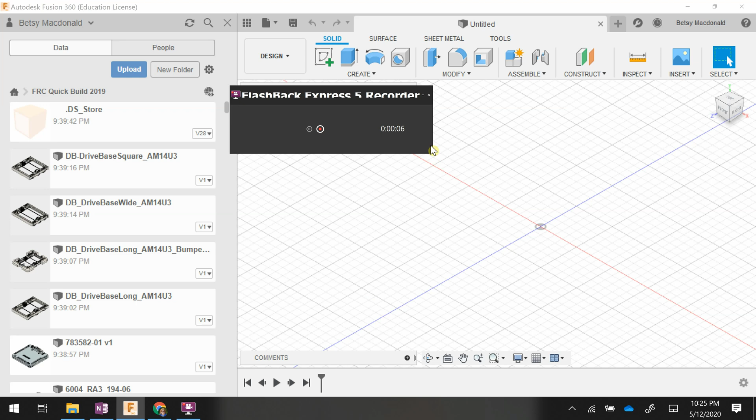So we need to have our QuickBuild open. I left mine in downloads. I'm going to go back to downloads and go to the robot QuickBuild folder that I unzipped, and open the user guide with bumpers. Sorry I didn't have that open ahead of time, I just wanted to remind you it came in a zipped folder.

Okay, so the beginning of the document has a parts list, a tools list, and a few other things. You can see the page we need to start on is page 9. If you're not on page 9, you can just navigate there, depending on which PDF reader you are using. Anyway, page 9 shows that we're going to need 4 outer wheels.

Now we're only going to build one wheel. We're going to build it as a component and we'll end up using it 4 times.

So back over in Fusion, well, the first thing we got to do is make a... well, I haven't saved this. I'm going to save it. I think I deleted it after I practiced. Okay, so I'm going to call it chassis quick build. If you already have a saved document, don't worry about this.

Okay, so now we need to make a component. This is pretty important, so that's under assemble. We're going to make a new component. The parent is selected - that just means it shouldn't be buried within a different folder.

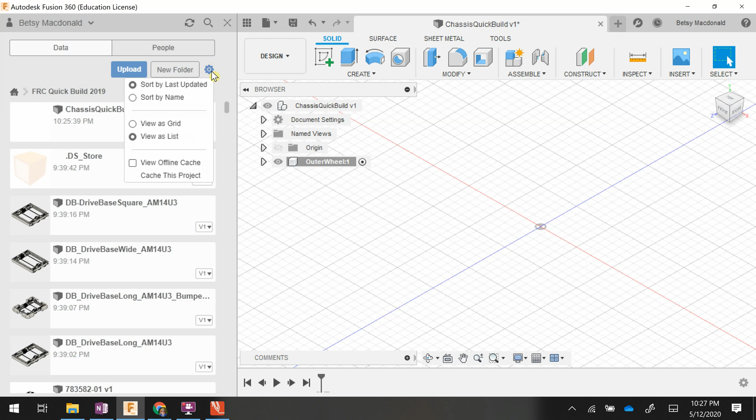So now we're going to find the pieces. Let's find this pulley - we're going to find 2 pulley halves, AM2234. You definitely want this sorting by name, and scroll down to the AM. Now we want 2234. Oops, I went too far.

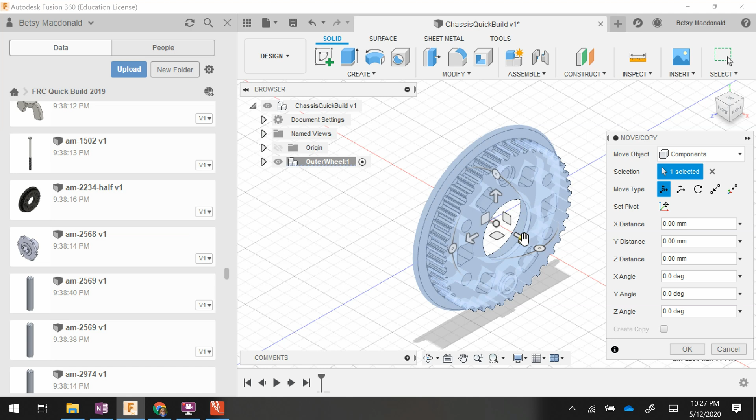Okay, so there's one. When you put a component in, it waits for you to position it. I don't know, we can move it back a little bit. Whatever, but there you go. We're going to click OK to place that one.

Now we're going to bring in another one. I'm going to pull it out a little bit so I have room, and shut this temporarily so we can maneuver to each one, and I'm going to click OK. Okay, so we have 2 wheel halves, and you can see that if I open the component we started, they got placed in there, which is perfect.

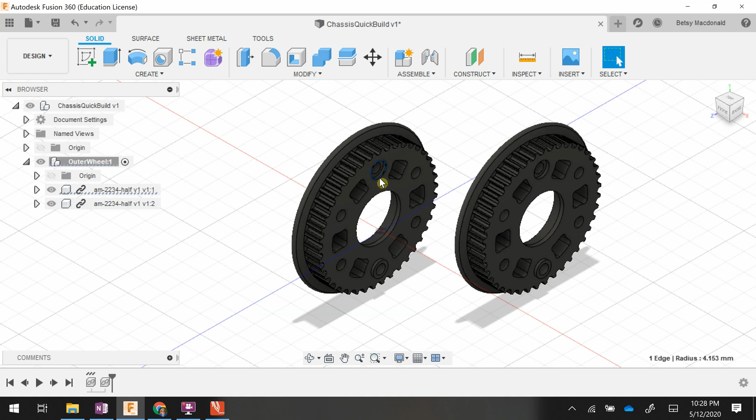Okay, so now we're going to use the joint skills we learned last time, and we basically want to joint this ring with this ring. So I'm going to click this ring, then hit the J key, and you can see it already knows it has this one selected. Now I'm going to click this select key. I'll zoom in a little more and make sure I clicked that ring.

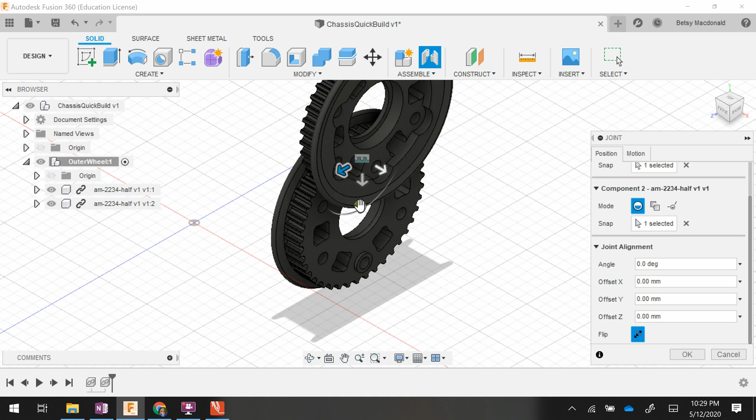Now, when they initially pair, they basically go identically on top. So if we come down here and click the flip button, and then re-rotate it 180 degrees so it's perfectly meshed. Okay, so you can see those were well meshed, and we'll leave those like that.

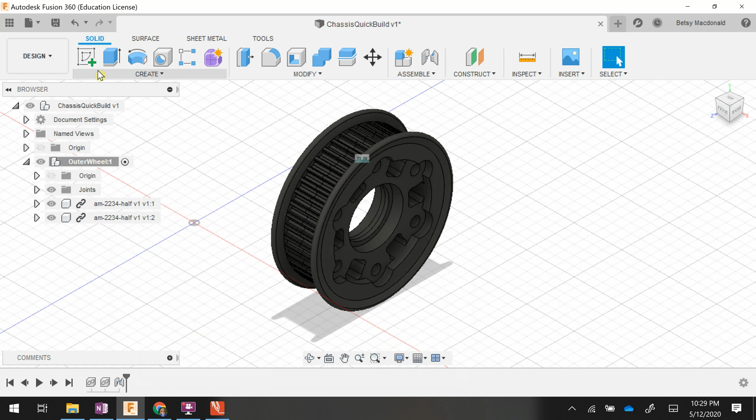So if I flip back to our quick build guide, we have these pieces meshed. Now we need this outer wheel, which is AM0940B. So if I go back, open up that again so I can see my parts - AM0940.

0940. Okay, this looks kind of strange. I'm going to put it in. I'm going to rotate it so it's facing the same direction. Now, there's something not right here because it doesn't have the inner structure.

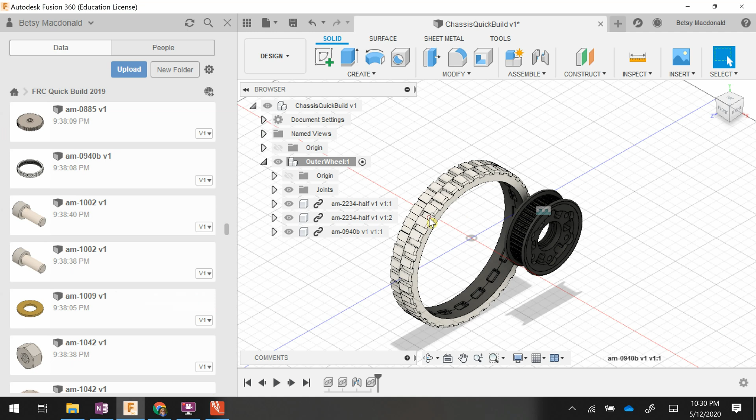So if you look at this, we're expecting the one with the inner... sorry, like a hubcap - it's not a hubcap, I don't remember the name. Anyway, so the wheel that we downloaded isn't exactly what we need. And I looked through and I couldn't find it anywhere. For now, we're going to select this and delete it because it's not the right one.

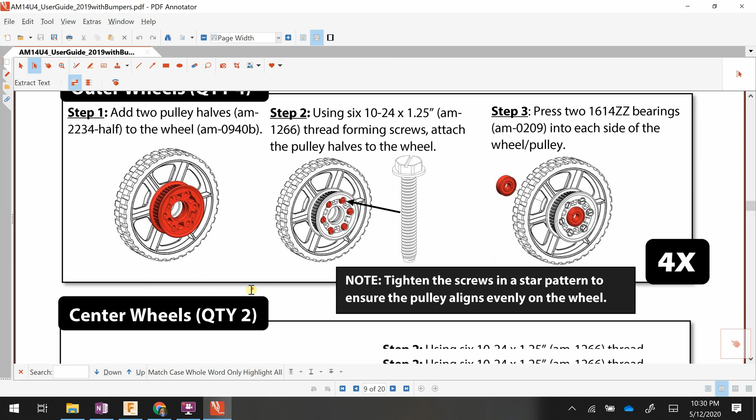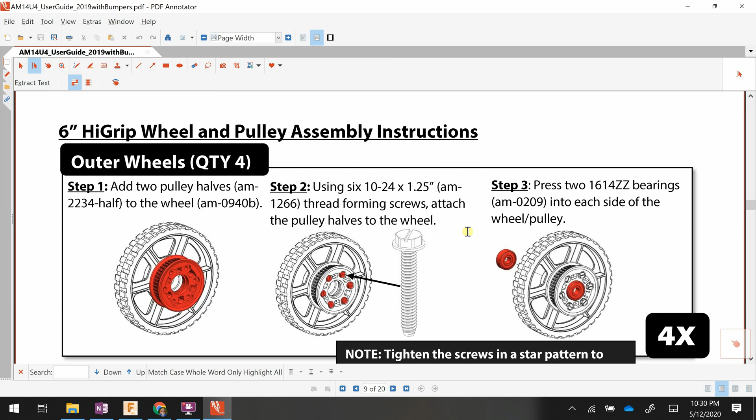So we're going to go to the source. Now look, if I click - ideally I could scroll back up to the top in the parts list and it has a link there, but I already know it's not going to find the page.

So we're going to go to the AndyMark website, I think it's just andymark.com, and we are going to search for AM-0940B. And this looks like the thing we need. So let's click it. Now, the reason I'm bringing you to the AndyMark website is because they provide the CAD models for all of these things. So it is a 6-inch diameter, and you're going to go to 80A, and that's what we're looking for.

Which doesn't really matter because it doesn't change the CAD file down here, so I didn't actually have to do that. I just have to scroll down and click this thing that says CAD file, and now it downloads that model. If I go to my downloads folder, you can see that I actually already did this - but there's my HiGrip wheel.

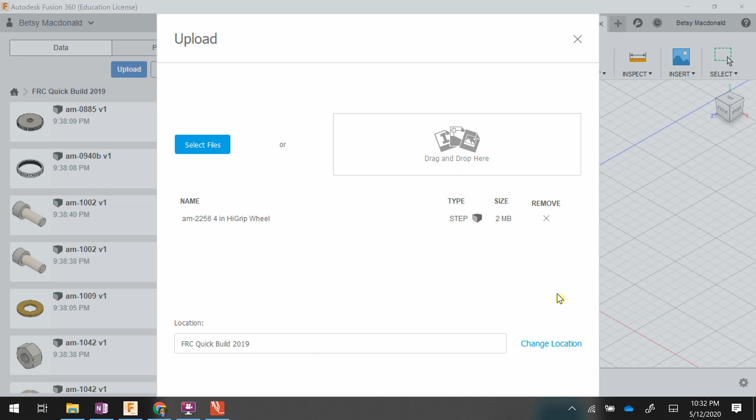So what I can do is go back to Fusion. I can upload, I can drop my STEP right here. Oops. And you can see it's ready to import. And again, I gotta move my box up so I can see my upload button.

And it will take a minute. It's a different format, but that's not gonna make a difference. So we'll wait for it to upload. You can see the progress here too, so I'm gonna close that.

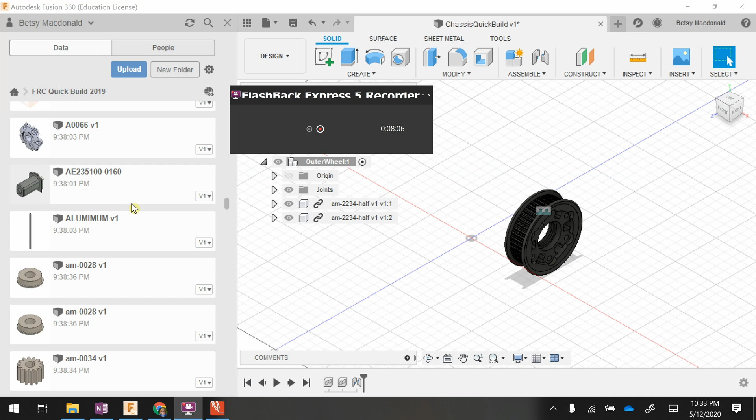Okay, now it won't put itself in place automatically. So let's go and sort by last updated. And if we scroll all the way to the top, it's going to be on top because that's the most recent thing that happened. So now I'm going to pull this one out.

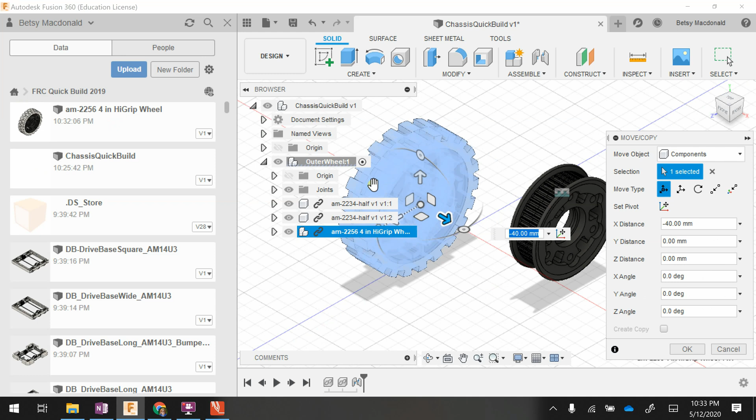You can see it's looking like we expected it to. I'm going to push it back and push it over. Actually, let me shut this because it takes up so much space on my computer. Okay, so good, I got a wheel in there.

So now I'm going to want to mate this whole collection with that. It is a good idea to click the thing you want to move first. So I'm actually going to move the wheel to the pulley system. I'm going to zoom in, do an outer rim again, and hit J for joint.

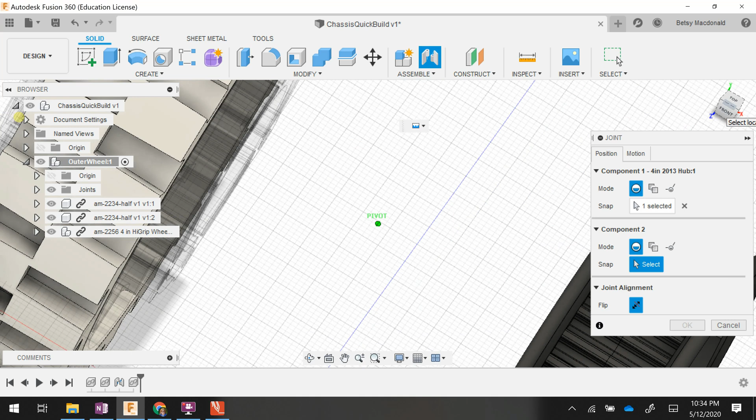I'm going to click this button and scroll around. Actually, let me go left and upright. And I actually want to click this here.

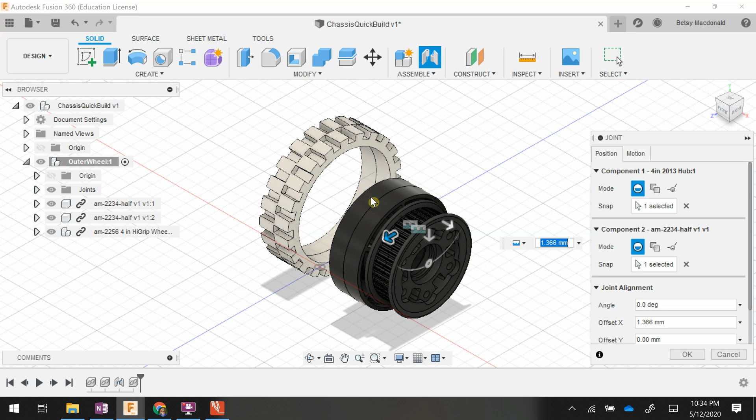Okay, so I want to mate it to that ring. And you can see, oh, it only did the outer ring. That's okay, let's highlight that. I can highlight this outer face. Whoops, hold the phone. Okay, I hit escape because I forgot to hit undo before I paired more.

Let's leave this wheel in place and we'll start with this one. I'll show you what happens instead. So I'm going to use my navigation box, zoom in a little bit, get that ring, make sure it's the outer one, the outer edge, hit J.

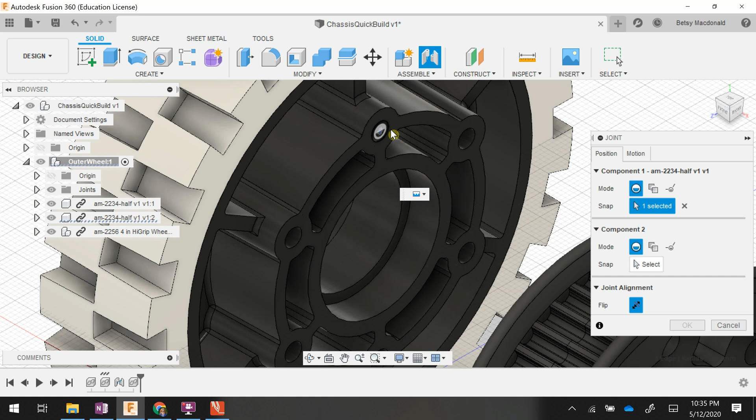I'll go back to the home view so I can scroll in. I can zoom in more to make sure I get the edge accurately. Whoops, I forgot to change my select button. Let's hit X, start again.

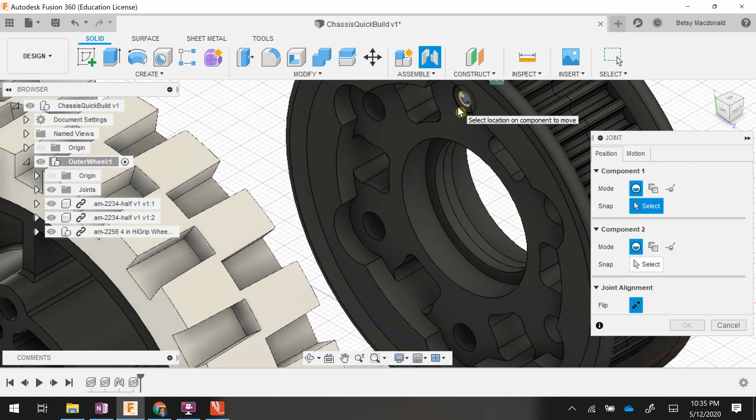Okay, so I'm going to click that corner. That will work well. Okay, so we're going to click this ring. Ooh, that was component 2. Oh no, so component 1's been selected. Now I want to select component 2, so I can come up here.

Zoom on in, click that edge, and there. It brought it in. Let me click OK, and then the other one matches it. So now I have those pieces connected. So rewind if you need to see that again, because I was zoomed out when they connected to each other.

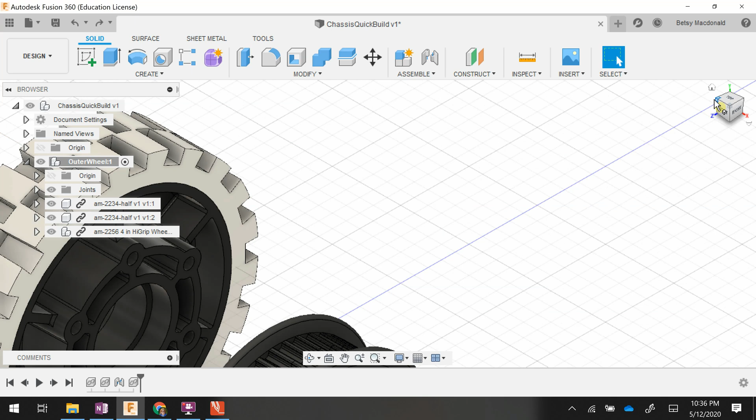Actually, I'm going to undo because I'm a glutton for punishment. So here's what we did. If you look, you can click this corner. It gives you a nice view of that inner ring.

I'm going to click the one at 12 o'clock. I'm going to click that outer edge at 12 o'clock. And I'm going to click the home button. Then I'm going to click J for joint.

Now I'm going to click this because I'm about to select component 2. Then I'm going to click this outer edge. I got to zoom in.

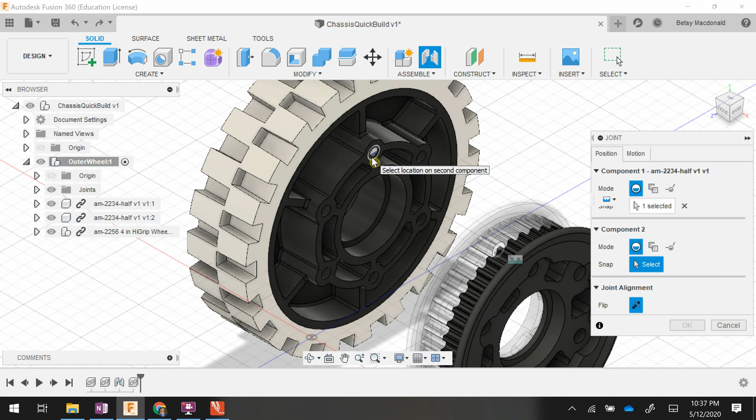Now here's what's going to happen. So there's the outer edge. You can see that it looks like it only did half, but as soon as you click OK, it all goes back together. So that's great. I'm going to save.

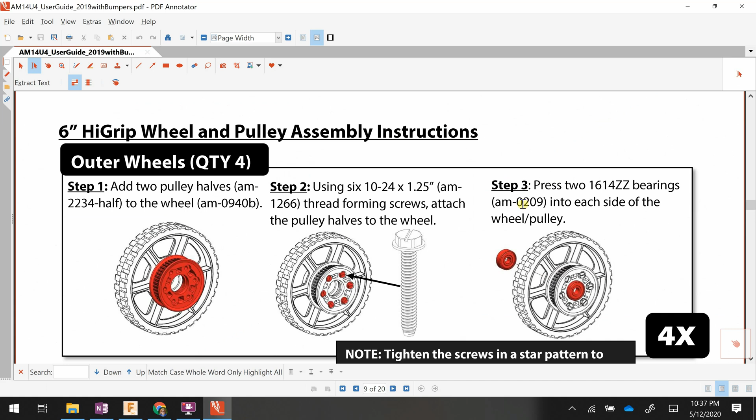Okay, let's look at the next piece. The next piece is called the AM0209. So we'll go back here, open our parts again. It begins with AM and it's 0209.

Oops, oh, I'm not sorted. So let's make sure you're sorted by name. Scroll to the AMs, 0209. Here we go, I'm going to pull one out.

We have to do a little manipulation. So we're going to want to rotate it 90 degrees in the Y angle. I'm going to pull it over here and pull it over here so it's somewhat lined up with that, and click OK.

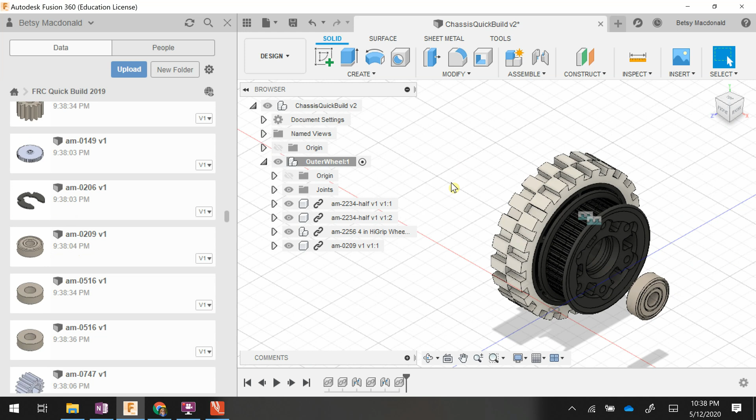Then I'm going to pull another one out to this side. Well, it didn't go to that side, but that's fine. Make sure that rotates by 90 and move it to the back and click OK. So now those pieces are ready to place. I'm going to close that again so I have room.

For this one, I decided to use the inner face here and the outer face here. So again, you want to start with the piece that's going to move. So I'm going to click here, and I'm going to hit J, and then I'm going to click here.

And I think I forgot to do something. Let me try that again. Actually, let me cancel, I think I forgot to click the select button. So click here, J, click this select button, click this inner ring, and there it goes.

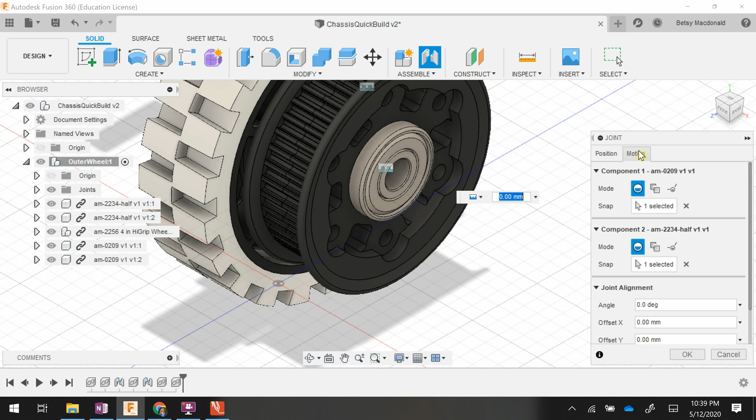And remember, it's wiggling because all of these are rigid joints. So when these pieces are together, like on the actual robot, they don't move within each other. Okay, so we're going to do the same thing with this one.

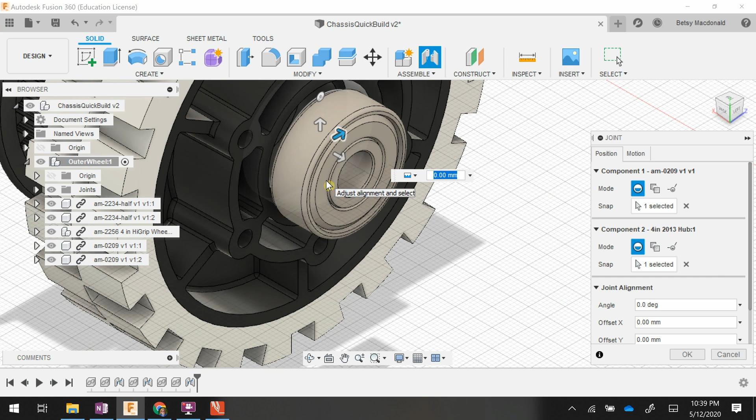So I am going to click the bearing way over there, and we'll use the same process. Start with the one you want to move, hit J, remember to hit the second component thing, do the interface, click OK, click the home button again.

I think we're done with our outer wheel. So if I go back here, our outer wheel is done, I can click it and the whole thing gets selected. So we'll be using that later.

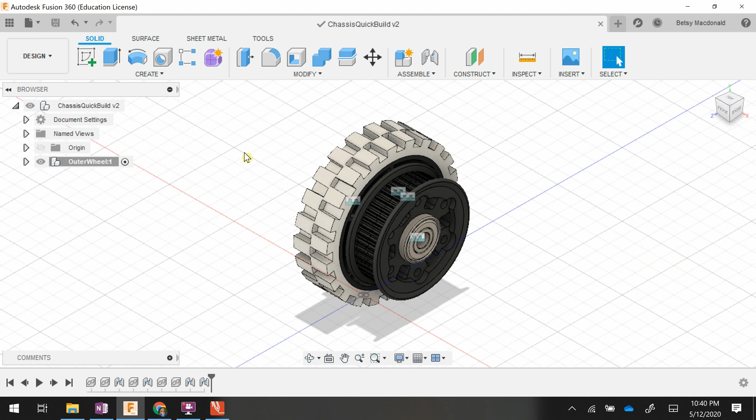For now, you can just save your file. Then, I wonder if I can delete this instance of it. Let me just try something. Well, let me undo. Okay, so I'm going to stop the video there.